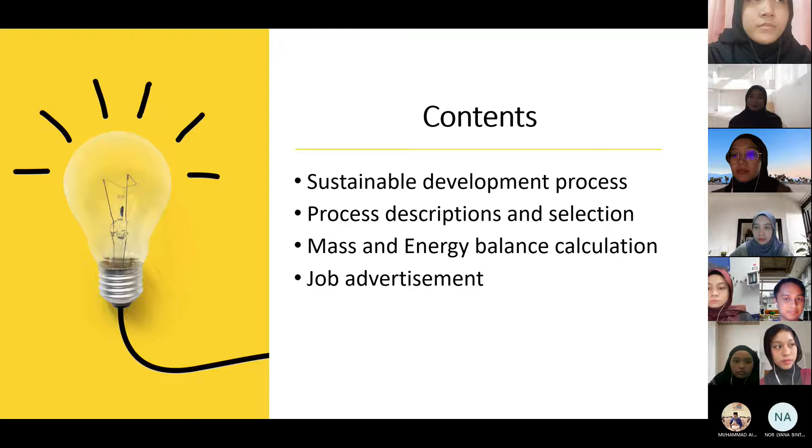First, sustainable development process that takes into account the impact of the following pillars to the proposed plan are environment, social, and economic. Environment: energy, electricity, and water. Methanol production process consumes vast amounts of energy and water. Influence of electricity sources and catalyst type on production of methanol.

Global warming: the lowest global warming impact was from co-production of methanol and renewable corn ethanol. Methanol is very harmful for human consumption because it is a flammable liquid with faintly sweet, pungent odors similar to ethyl alcohol, explosive and poisonous to humans.

Methanol is highly toxic for humans if inhaled or absorbed orally and can lead to blindness and, in worst case, even death. Methanol may affect animals, birds, and fish, leading to their death. Exposure can also cause slow growth rate in plants. Long-term methanol exposure can affect the fertility of biota and affect their appearance or behavior.

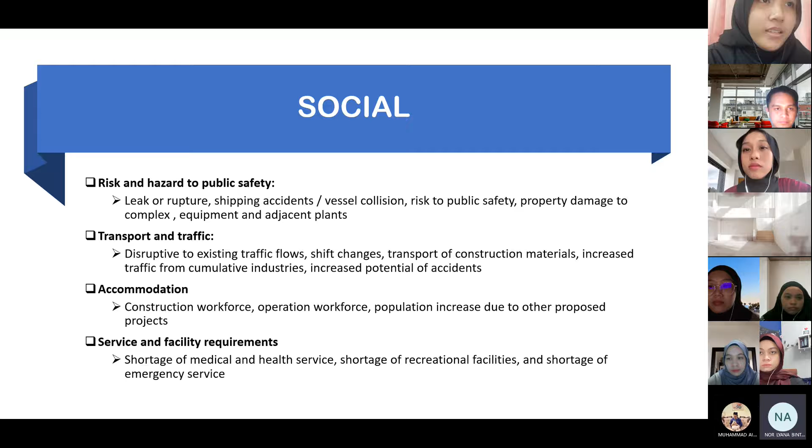Next, I will pass to Aisha.

Okay, then the economic: commodity pricing risks. The economic viability of small-scale methanol plants depends heavily on natural gas feedstock and methanol product pricing. High volatility or commodity price beyond this assumed in this analysis presented in the report should be carefully evaluated for impact on cost and economy. Next, technology risks.

A number of companies are developing small-scale methanol technologies, but none of them has deployed a commercial plant. Methanol production is mature at larger scale. Small-scale methanol may pose unknown or unanticipated risks, mainly because existing technologies have not been scaled up to commercial level as of the time of publication. Careful evaluations of technical viability with emphasis on scale-up risks should be conducted before investing in small-scale methanol plants.

Next, capital cost risks. Given the lack of commercially operating plants, capital costs of small-scale methanol plants were assumed for the economic analysis in this report. These capital costs should be verified and validated through careful cost estimation and planning.

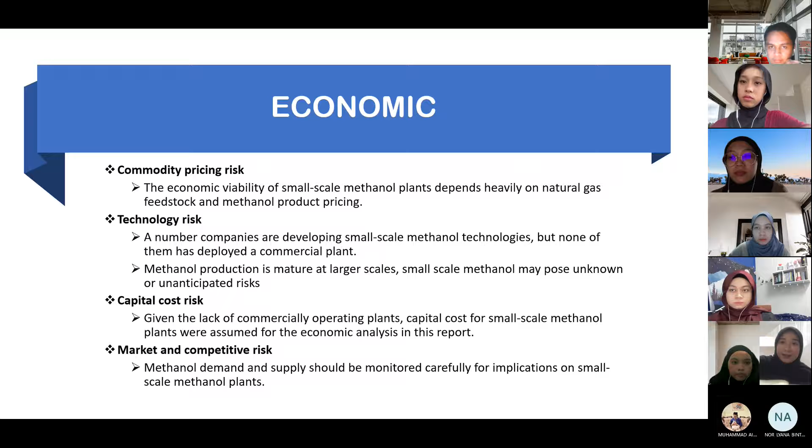Next is feasible suggestions. To reduce expense, the process of methanol needs to use a simpler and less costly syngas cleaning system based on a zinc bed, carbon filter, and zeolite membrane. Next, form a partnership with community members to prepare a suitable housing plan for the construction and operation crew. New plant should be designed using best practicable engineering design and operated using best industry practice management system.

Plant proposal that is not harmful to human, environment and animal. To reduce environmental impact, renewable energy should be used instead of coal and nuclear energy. To control global warming, the production of greenhouse gases must be kept in approximate balance.

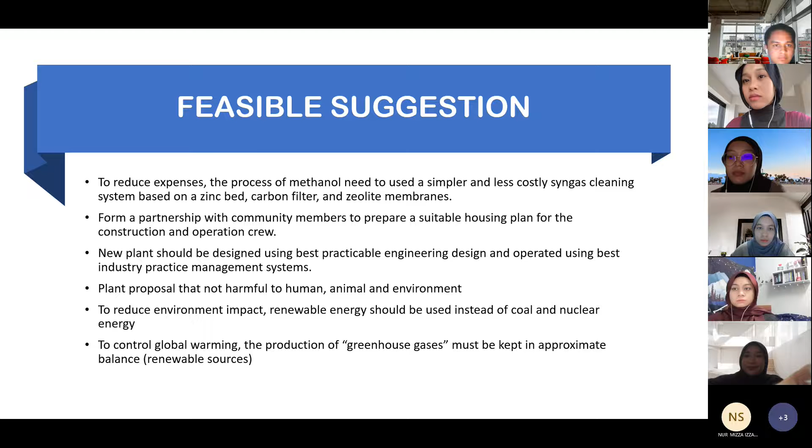Next, I will pass to task 2. Next, we are going to discuss the process description and selection. There are 5 processes available in the methanol processing industry. The first one is methanol production synthesis gas via carbon dioxide hydrogenation.

The second one is methanol production by catalytic reduction of carbon dioxide using copper and palladium as catalysts. The third one is methanol production via catalytic coal gasification. The fourth one is methanol production anaerobic digestion from squander stream. And the last one is methanol production via methanotrophic bacteria Methylacidiphilum fumariolicum.

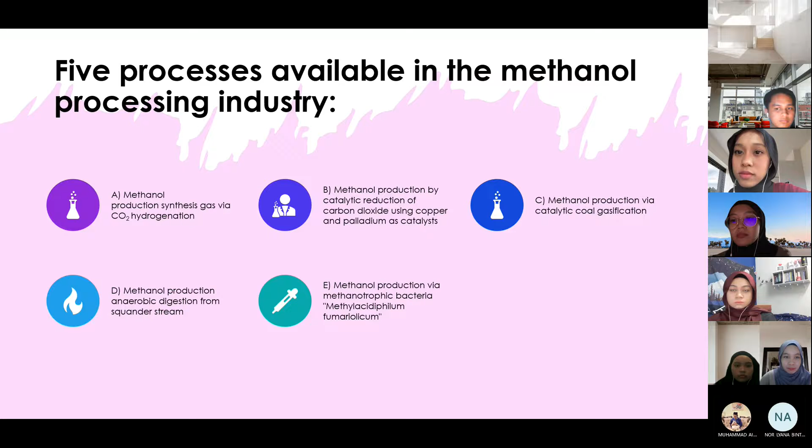So the description for the first process is methanol production synthesis gas via carbon dioxide hydrogenation. Methanol is manufactured conventionally from petroleum product synthesis gas via hydrogenation of carbon monoxide and carbon dioxide, as well as a reverse water gas shift process. Methanol is an important industrial chemical as well as a versatile fuel.

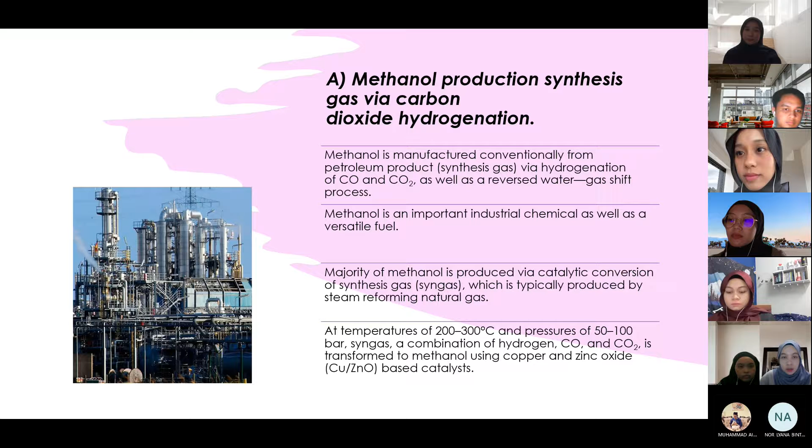Majority of methanol is produced via catalytic conversion of synthesis gas, which is typically produced by steam reforming natural gas. At a temperature of 200 to 300 degrees Celsius and pressure of 50 to 100 bar, syngas, a combination of hydrogen, carbon monoxide, and carbon dioxide, is transformed to methanol using copper and zinc oxide-based catalysts.

Next is methanol production by catalytic reduction of carbon dioxide using copper and palladium as catalysts. This utilizes carbon dioxide as the carbon source in hydrogen-based processes, where the hydrogen is created from water using renewable energy, and the reaction produces methanol. This will aid in the reduction of carbon dioxide emissions and the reduction of reliance on fossil fuels.

Using nanoparticles of the catalyst dispersed on a porous support material improves the surface area of the catalyst. Mixing palladium and copper gives the most efficient conversion of methanol from carbon dioxide, in the atomic ratio range of 0.3 to 0.4.

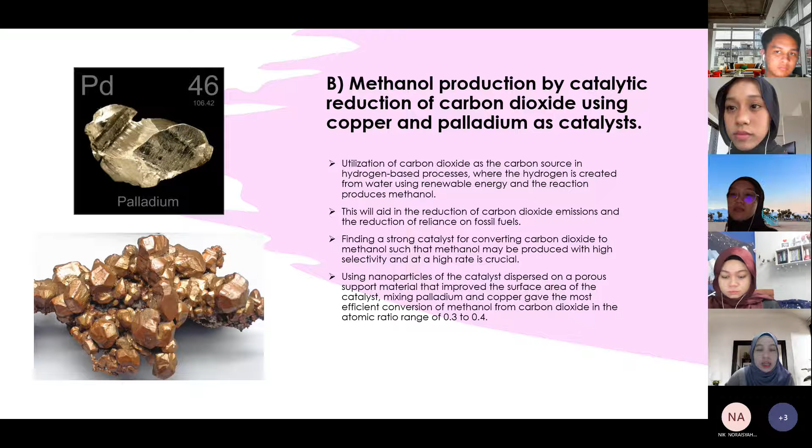One of the processes to produce methanol is via catalytic coal gasification. Gasification of coal produces synthesis gas, which is carbon monoxide and hydrogen, followed by catalytic conversion to manufacture methanol. This process is named the methanol from coal process.

Coal gasification is a process that transforms carbonaceous materials into carbon monoxide and hydrogen, such as coal, petroleum coke, or biomass. Coal gasification is growing in popularity as a power generation technology due to the readily available raw material around the world, as well as the beneficial environmental aspects associated with this technology over other combustion technologies.

Most of the methanol industry's progress in the early 21st century, the third golden age of methanol expansion, was fueled by China's rising economy. China's petrochemical industry had been heavily reliant on imported crude oil, despite the country's abundant supply of low-cost coal. China began to adopt innovative technology for converting coal into various chemicals, and methanol was a significant component in that process.

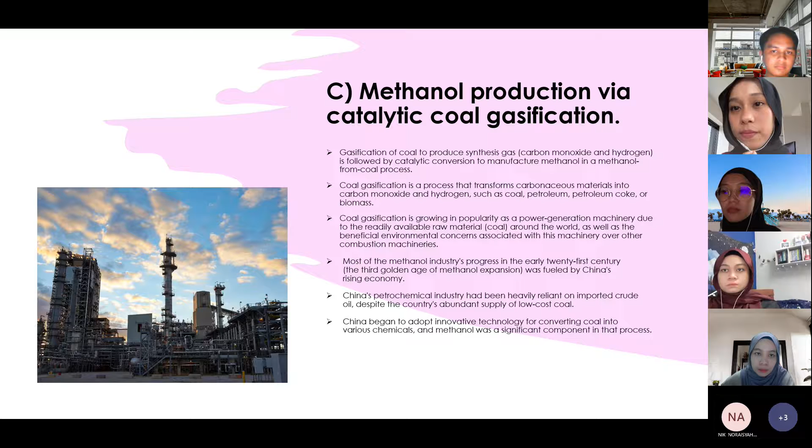Next is methanol production via anaerobic digestion from waste streams. Anaerobic digestion is a process in which microbes break down organic matter in the absence of oxygen. It is a low-energy, technologically easy method for converting organic material from a variety of wastewater types, solid waste, and biomass into methane. Anaerobic digestion for biogas generation occurs in a sealed vessel known as a reactor, which can be designed and built in a variety of forms and sizes depending on site and feedstock circumstances.

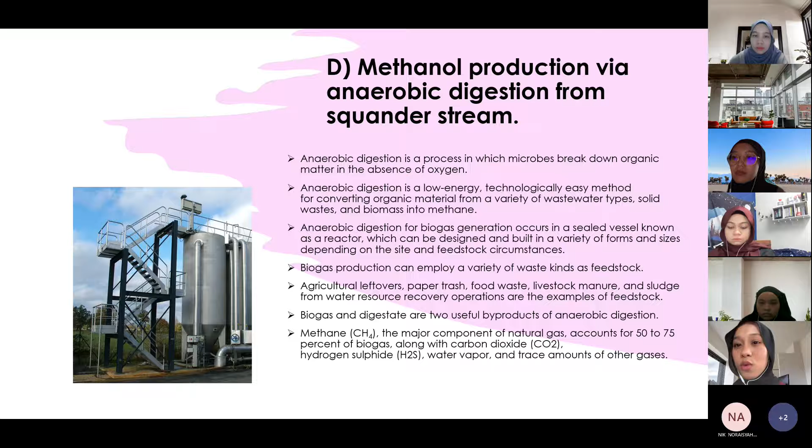Biogas production can employ a variety of waste kinds as feedstock. Agricultural leftovers, paper trash, food waste, livestock manure, and sludge from water resource recovery operations are examples of feedstock. Biogas and digestate are two useful byproducts of anaerobic digestion. Methane, the major component of natural gas, accounts for 50 to 75% of biogas, along with carbon dioxide, hydrogen sulfide, water vapor, and trace amounts of other gases.

Next is methanol production via methanotrophic bacteria, Methylacidiphilum fumariolicum. Modern methanol creation changes over methane from gaseous petrol into methanol through a multi-step compound interaction. Natural methane to methanol conversion occurs under moderate conditions, and utilizing biogas would be even more harmless to the ecosystem.

Methanotrophs, which are microorganisms that utilize methane as an energy source, convert methane into methanol in a single step, catalyzed by the compound methane monooxygenase. The enzyme methanol dehydrogenase catalyzes the subsequent transformation of methanol into formaldehyde, which is a significant task. Methanol dehydrogenase is required by aerobic methanotrophs, which are bacteria that oxidize methane for carbon and energy, to convert methanol to formaldehyde.

In this review, we utilize the thermoacidophilic methanotroph, Methylacidiphilum fumariolicum SolV for natural methanol creation.

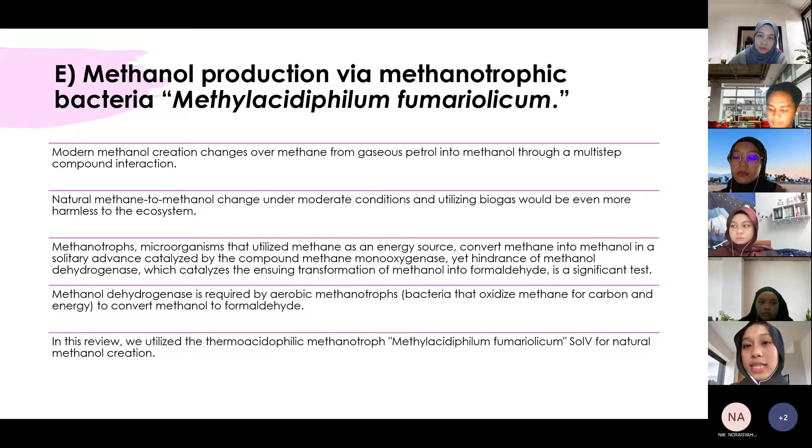Next is the merits and demerits of each process. The first one is methanol production, synthesis gas via carbon dioxide hydrogenation.

The merits are: carbon dioxide can be used directly, acting as feedstock to supply useful chemicals and materials; reduction of carbon dioxide quantity; and low cost. The demerits are: it is one of the greenhouse gases which may cause global warming, and reversible reaction and formation of greenhouse gas may also occur.

The next one is methanol production by catalytic reduction of carbon dioxide using copper and palladium as catalysts. The merits are reduced carbon dioxide emissions, reaction conditions are milder due to less exothermic reactions, and methanol can be produced in high selectivity at an efficient rate.

The demerits are: it is less reactive than syngas, which leads to larger reactors being needed; more water is produced due to the reverse water gas shift reaction; higher carbon dioxide partial pressure; and more carbon dioxide produced in crude methanol.

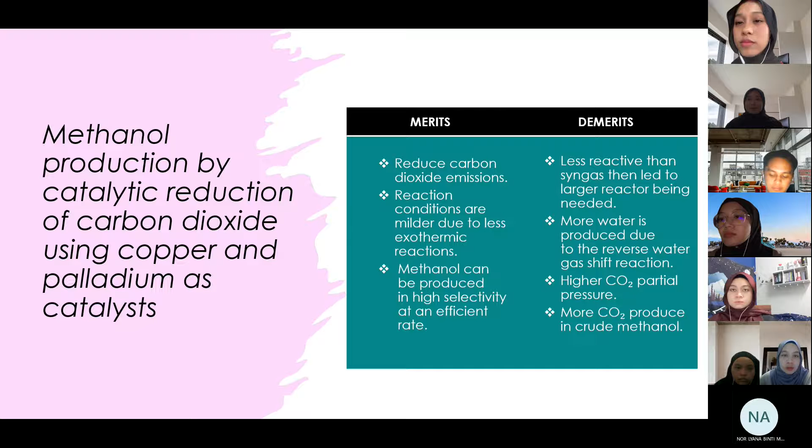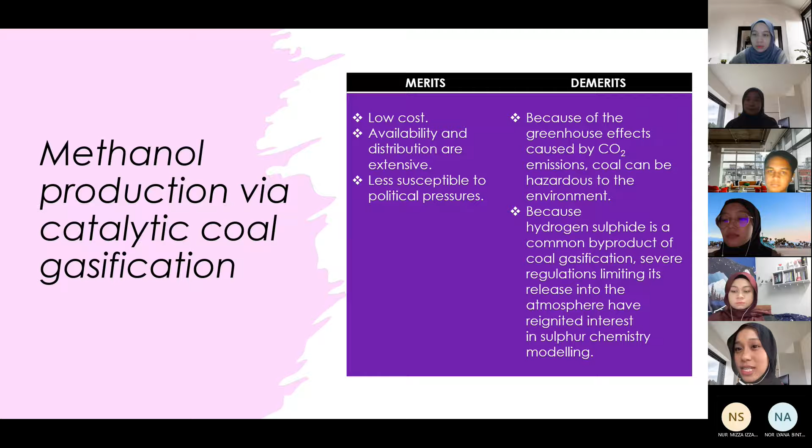Now let's review the merits and demerits of methanol production via catalytic coal gasification. The merits are low cost, large availability and distribution, and being less susceptible to political pressures. The demerits are that coal can be hazardous to the environment because of the greenhouse effects caused by carbon dioxide emissions, and severe regulations limiting its release into the atmosphere have reignited interest in sulfur chemistry modeling, because hydrogen sulfide is a common byproduct of coal gasification.

Next is methanol production via anaerobic digestion from sewage streams. The merits are that it converts sewage into renewable technology, creates a more environmentally friendly gasoline, and removes germs dangerous to humans from biological waste. Fertilizer is manufactured, and it helps lower our carbon footprint. The demerits are that it does not convert as much carbon from biomass to biogas as gasification does, and methane producing organisms develop at a slower rate than aerobic species.

Last is the merits and demerits of methanol production via methanotrophic bacteria, Methylacidiphilum fumariolicum. The merits are low cost and an efficient methane liquefaction model. The demerits are difficulties at high cell densities, biphasic cell development processes, and chemical methanol dehydrogenase inhibitors, which can also inhibit other important enzymes, being used to increase methane conversion.

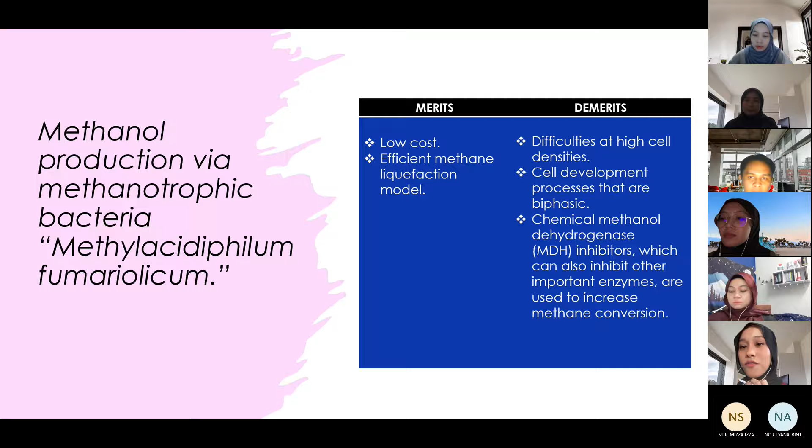Okay, next we are going to discuss the process block diagram, process description, process flow diagram (PFD), reaction stoichiometry, and supply of raw material.

Figure 1 shows the block flow diagram, BFD, for the methanol process. The block diagram explains how methanol is produced for industry. Overall, the process consists of 5 stages, beginning with the raw material, which is syngas, and ending with product inspection, which is methanol. The methanol production process is a typical loop process.

First, syngas is collected to serve as raw material for methanol production. After that, the syngas is fed into the methanol reactor and then separated in a separator. The separated syngas is then transferred to undergo off-gas separation. Gas separation is a technique used to split up gases, either to separate and purify multiple or single gas components. Then the products of off-gas separation are either recycled back into the methanol reactor or directed to the methanol distillation process to produce methanol.

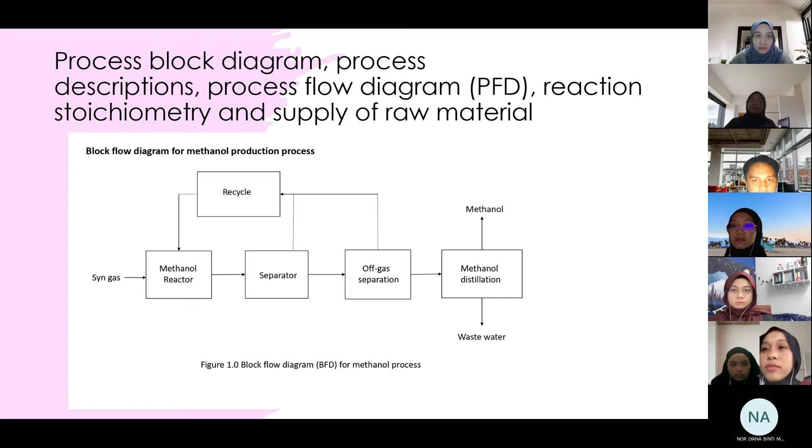Copper and zinc-based catalysts are widely utilized in this process. Natural gas reforming to produce syngas, conversion of syngas to crude methanol, and distillation of crude methanol are the three basic phases in the manufacturing of methanol. Exothermic hydrogenation of carbon monoxide and carbon dioxide is represented by equations 1 and 2, whereas the water-gas shift process is represented by equation 3. Because methanol synthesis from syngas is very exothermic, it is essential that the reactor vessel be fitted with a heat removal system. So these are the three chemical reactions going on.

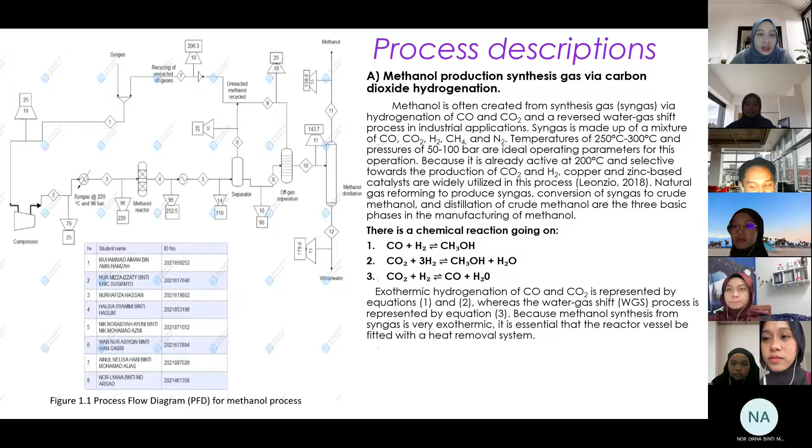The methanol process flow diagram is shown in figure 1.1. The compressor block was used to compress upgraded syngas from the water gas shift reactor. The compressor's design was outside the scope of this research. We employed an isentropic efficiency of 85% and a mechanical efficiency of 98%.

For methanol production, compressed syngas was warmed to 220 degrees Celsius. The vapors that exited the reactor were cooled. The separator, or flash drum, was used to remove unreacted gases from methanol. The unreacted vapors were partly recycled while the remainder was burned. The separator was used to distill liquid methanol from the flash drum. Methanol distillation gases were recycled as a separate product, and half of the pure methanol was collected.

At stream 1, the temperature is 25 degrees Celsius and the pressure is 10 bar. For the second stream, the temperature is 25 and the pressure is 70 bar. For the third stream, the temperature is 220 degrees Celsius and the pressure is 96 bar. For the fourth stream, the temperature is 252.5 degrees Celsius and the pressure is 95. For the fifth stream, the temperature is 110 degrees Celsius and the pressure is 14 bar.

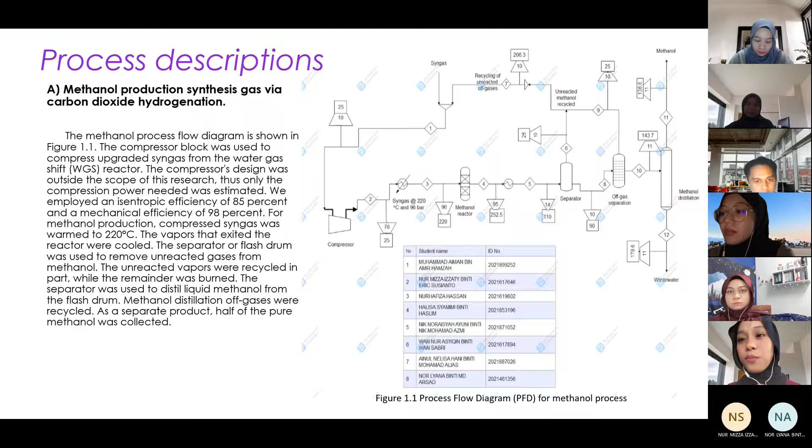And for the last one, which is the 12th stream, the temperature is 178.6 degrees Celsius and the pressure is 11 bar. Next is the supply of raw materials.

The first one is syngas. Carbon dioxide, carbon monoxide, hydrogen, methane, and nitrogen make up syngas. Syngas can be made from a variety of sources, including natural gas, coal, biomass, and petroleum distillate using a thermochemical process.

The next one is copper-based catalyst, achieved by mixing metal oxide with copper oxide in a series of steps. To begin, prepare a slurry solution containing catalyst precipitate by combining an acidic metal salt solution with precipitant solution. The precipitate is then rinsed in a slurry solution, maintaining the suspended condition.

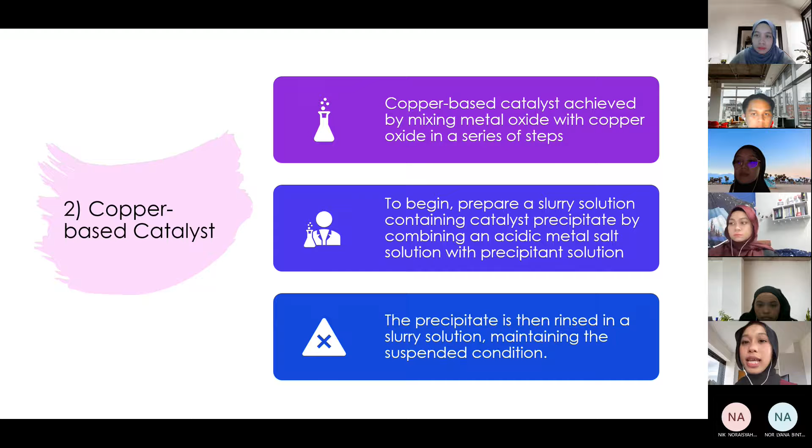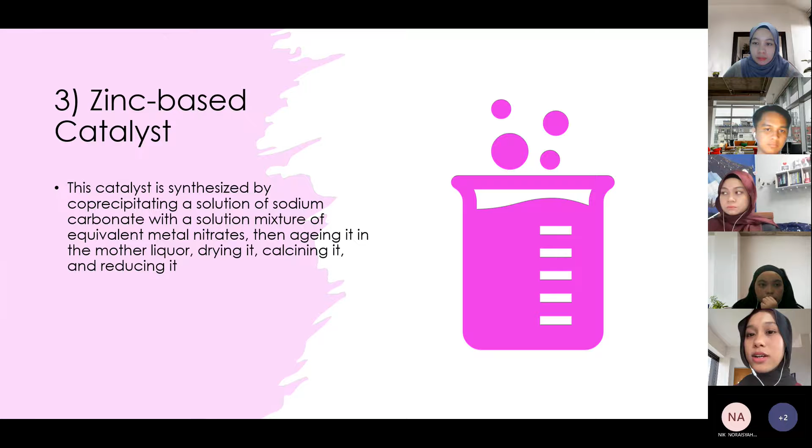And the last raw material is zinc-based catalyst. This catalyst is synthesized by co-precipitating a solution of sodium carbonate with a solution mixture of equivalent metal nitrates, aging it in the mother liquor, drying it, calcining it, and reducing it.

Next, 5 utilities and the importance of utilities and other support systems. The first one is cooling water. The function of cooling water is to remove heat from component or processes. Process fluid or equipment result in a rise of temperature or change of state in the cooling system.

The importance of cooling water is to cool processes and equipment in a closed recirculation system. Water containing heat transfer is cooled for reuse and the water loss is small.

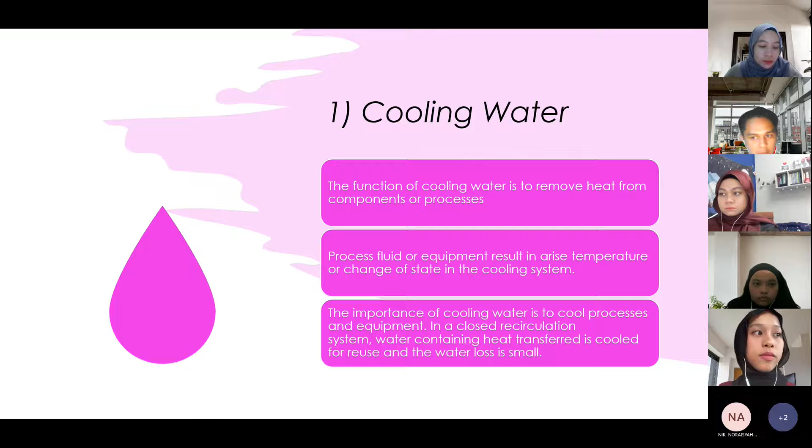The second one is steam or condensate system. Steam refers to the white mist that condenses above the boiling water as the hot vapor mixes with the cooler air. The steam has been condensed back into water by either raising its pressure or lowering its temperature. Steam vapor releases the latent energy to the process fluid and condenses to a liquid condensate.

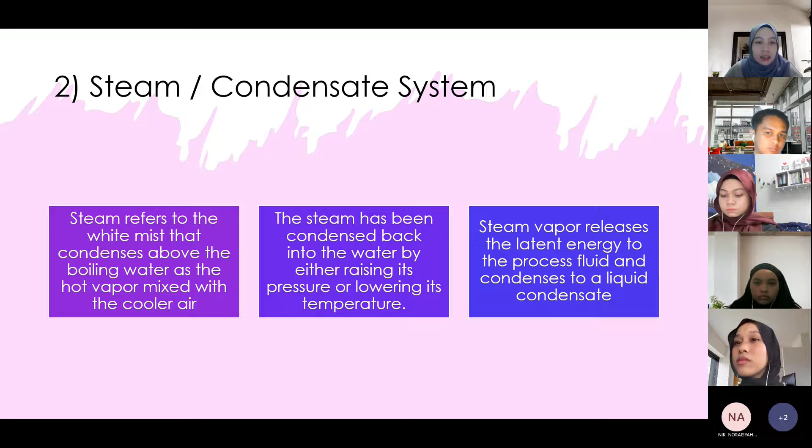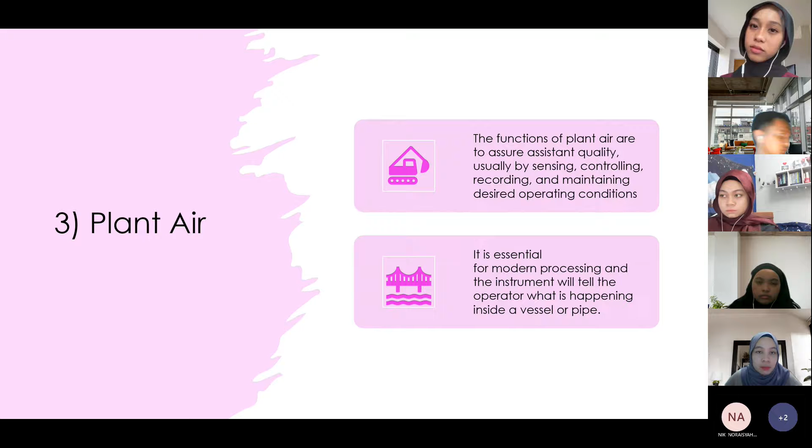The third one is plant air. The function of plant air is to assure assistant quality, usually by sensing, controlling, recording, and maintaining desired operating conditions. It is essential for modern processing, and the instrument will tell the operator what is happening inside a vessel or pipe. The fourth one is electricity system.

The electricity generation is divided into two regimes, which are ordinary regime generation and special regime generation, which are to obtain the requisite license and approvals. Last, the operation of the electricity market is to operate on a free market basis and integrate into the functioning of any organized electricity market.

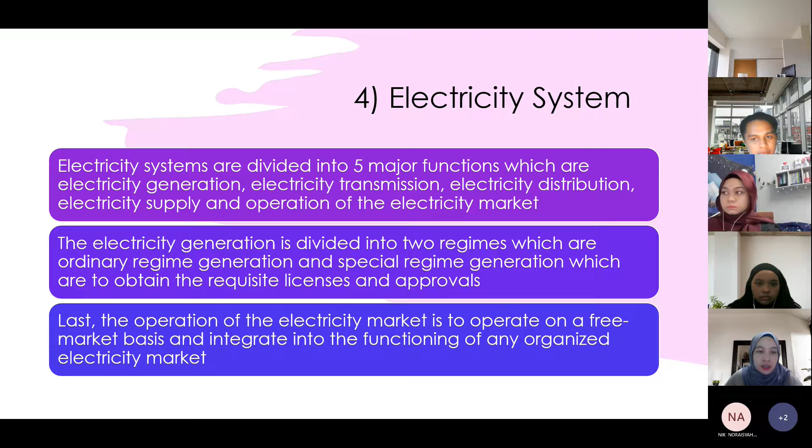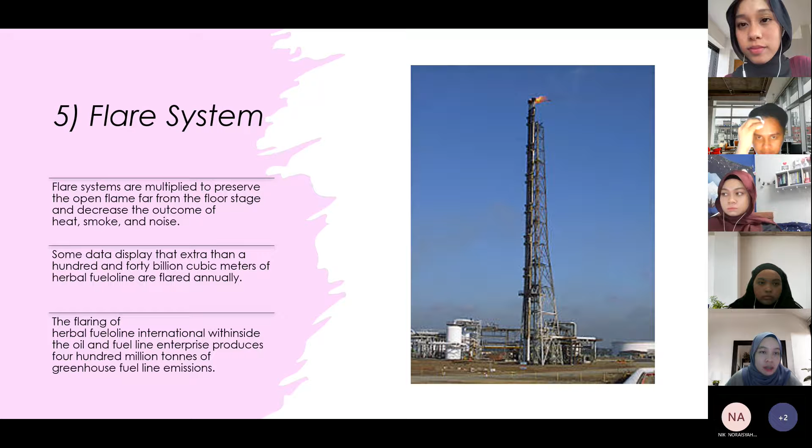The last one is flare system. Flare systems are employed to preserve the open flame far from the floor stage and decrease the outcome of heat, smoke, and noise. Some data display that more than 140 billion cubic meters of natural gas are flared annually. The flaring of natural gas globally within the oil and gas industry produces 400 million tons of greenhouse gas emissions.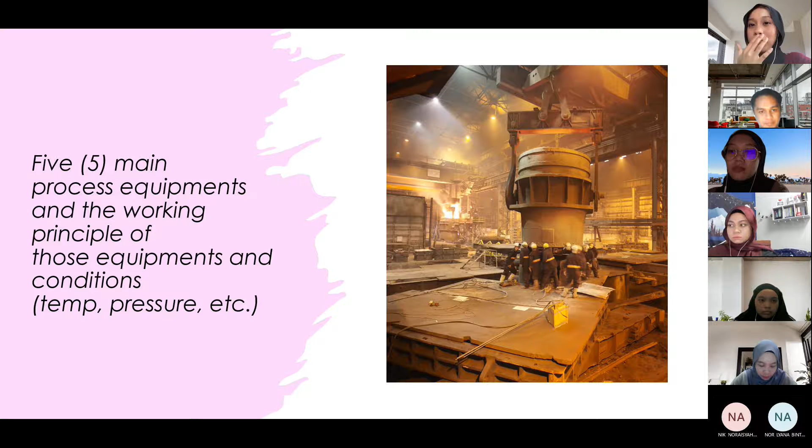Five main process equipments and the working principle of those equipments and conditions. The first one is heat exchanger. There are four types of heat exchangers, and one commonly used is the shell and tube heat exchanger.

Each one is employed in a unique method to recover heat from exhaust steam by heating the feed water that circulates throughout the units. From the turbine gland steam system, the gland steam condenser gathers steam, vapor, and also air. The steam is condensed and then returned, and the returns are cooled by the flowing feed water.

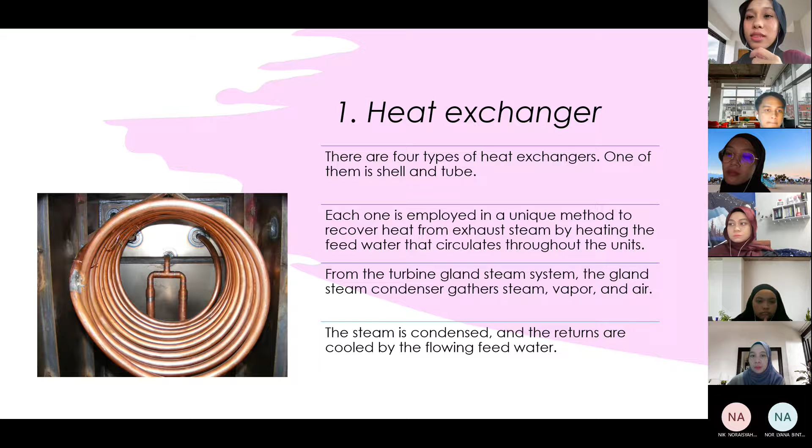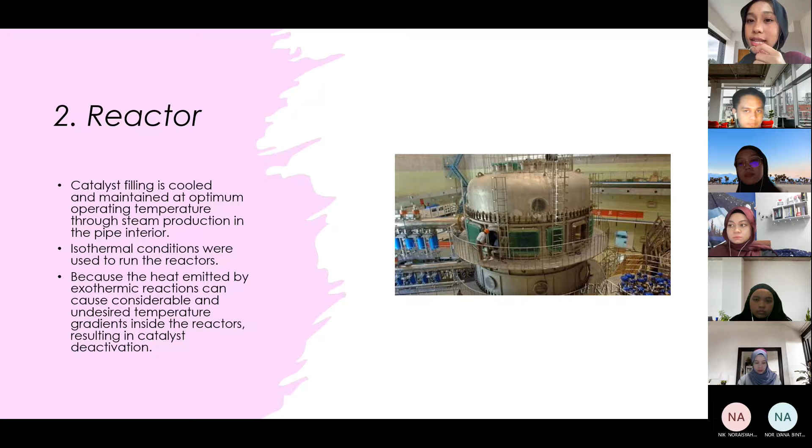Next is reactor. Catalyst filling is cooled and maintained at optimum operating temperature through steam production in the pipe interior. Isothermal conditions were used to run the reactors because the heat emitted by exothermic reactions can cause considerable and undesired temperature gradients inside the reactors, resulting in catalyst deactivation.

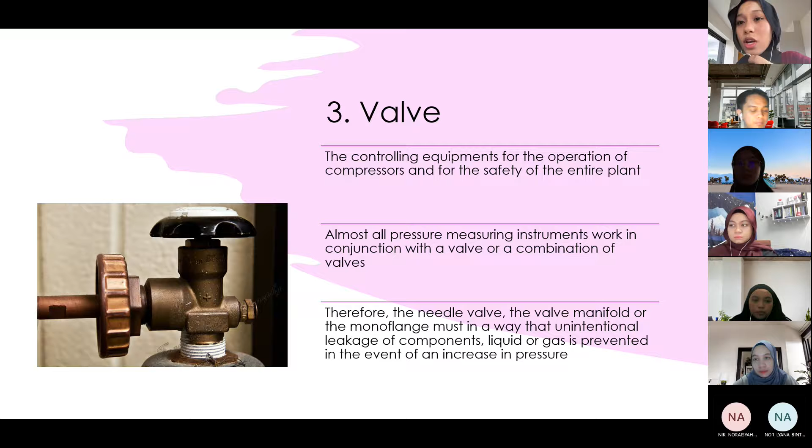The next one is valve, the controlling equipment for the operation of compressors and for the safety of the entire plant. Almost all pressure measuring instruments work in conjunction with a valve or a combination of valves. Therefore, the needle valve, the valve manifold, or the monoflange must in a way that unintentional leakage of components, liquid or gas is prevented in the event of an increase in pressure.

Next is the distillation column. The distillation column is made up of a series of stacked plates. The liquid flows over the plates and vapor bubbles up through the liquid via holes in the plates. Due to the many plates, vapor comes into contact with the liquid several times as it moves down the column. It is a crucial part in the distillation columns.

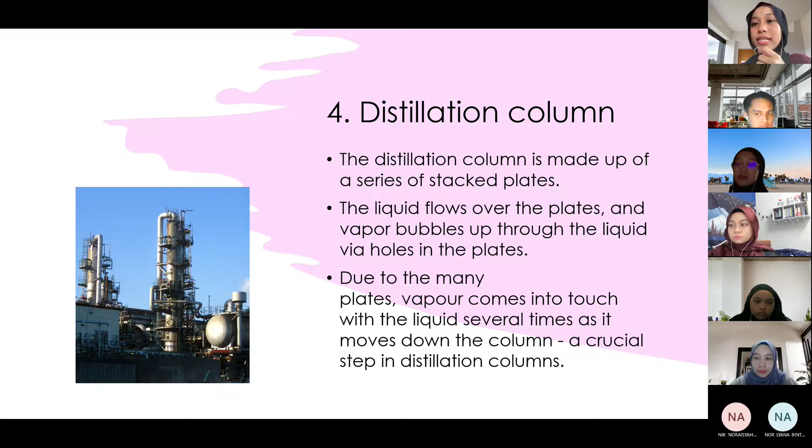And the last one is the compressors. Compressors work by increasing the pressure of a fluid while lowering its volume, which improves energy efficiency. By raising the velocity of the air with a spinning element, the compressor imparts kinetic energy into the air stream, which is then converted into potential energy in the form of pressure. The air is then cooled and excess moisture is eliminated between each step of compression to improve efficiency and also air quality.

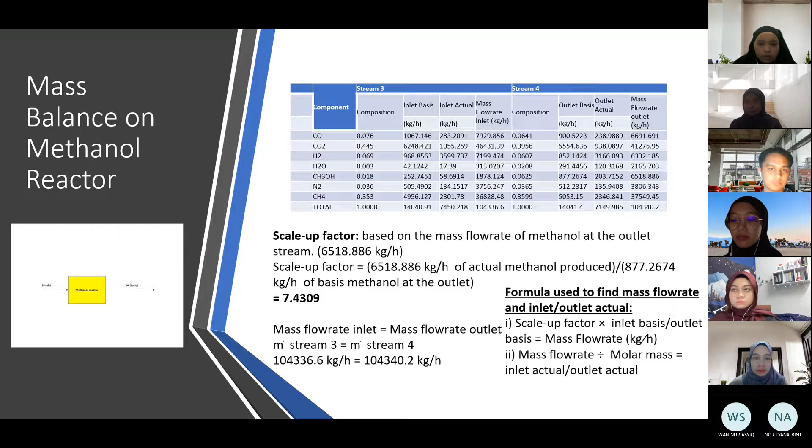Moving on to separator. In this process, not 100% of the component will undergo further processing because some will go to recycle pathways. That is why there are 2 outlet streams, which are stream 6 for the component undergoing recycling and stream 8 for further process.

The composition component of stream 6 is taken from a journal as our reference. To find the mass flow rate outlet of stream 8, we can do a mathematical calculation, which is the mass flow of stream 5 minus mass flow of stream 6.

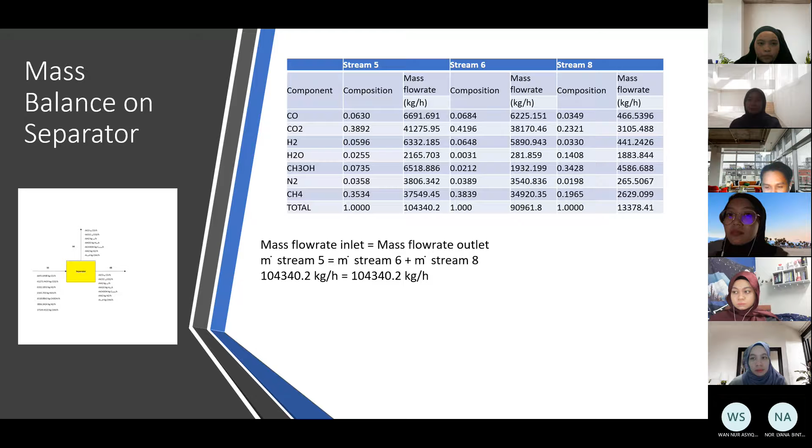Therefore, we can get the total mass flow rate of stream 5 is equivalent to mass flow rate stream 6 plus stream 8. The composition component of stream 8 can be found by using a formula of mass flow rate of component divided by total mass flow rate of stream 8.

Thirdly, gas separation. In this process, it only involves the separation of gas component and non-gas component. Stream 8 is the inlet stream, while stream 9 and stream 10 are outlet streams. There is no mathematical calculation needed since it's only the gas separation process.

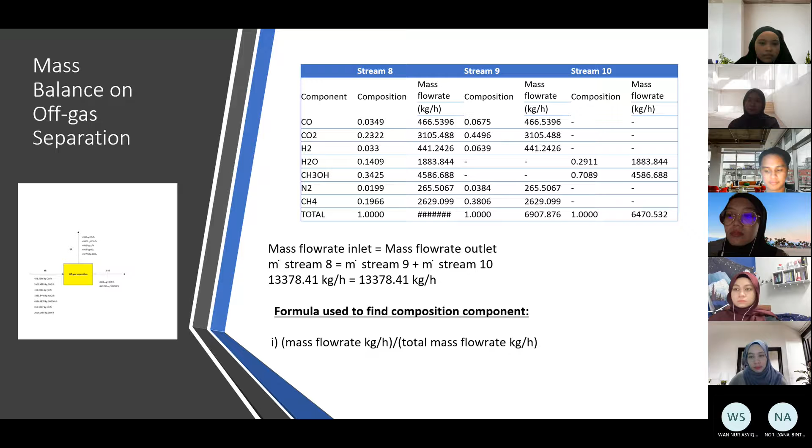Therefore, the total mass flow rate of stream 8 is equivalent to mass flow rate stream 9 plus 10 composition component. Composition component for stream 9 and 10 can be found by using the formula as shown on the slide.

Moving on to the fourth one, which is methanol distillation. In this process, it involves the production of methanol at stream 11 and wastewater at stream 12. Since the demand in producing methanol is 4,563.7544 kg per hour, therefore the purity of methanol can be assumed to be 99.5%. The composition for methanol at stream 11 is set to be 0.995 and for water is 0.005.

To find the mass flow rate at stream 12, perform a mathematical calculation where mass flow at stream 10 minus mass flow at stream 11 gives mass flow at stream 12. Therefore, the total mass flow at stream 10 is equivalent to mass flow at stream 11 plus stream 12.

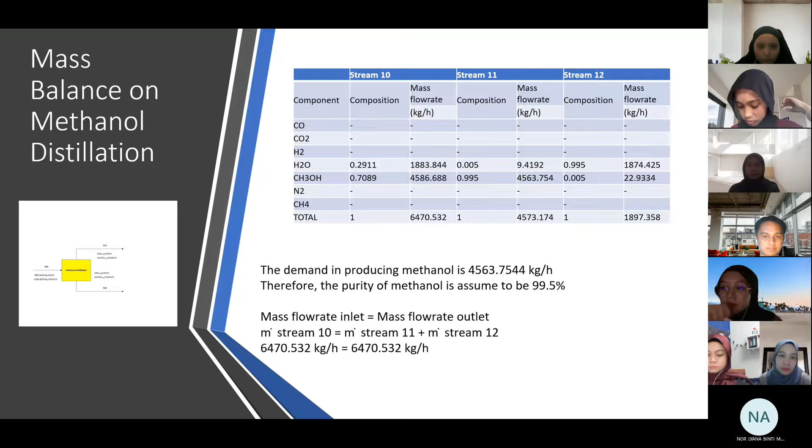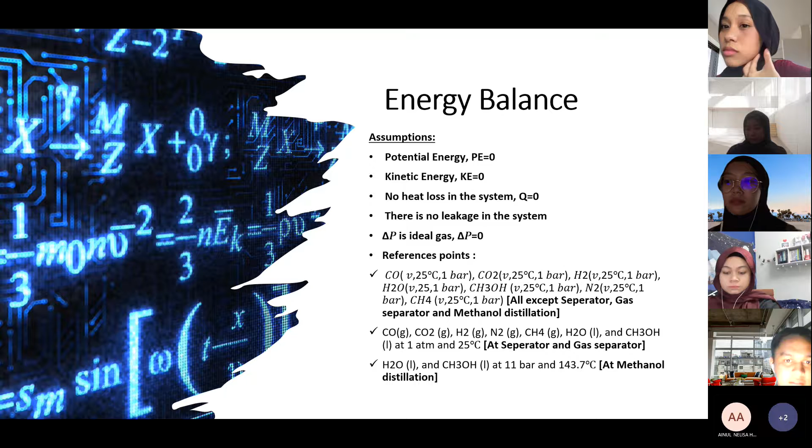Okay, so for energy balance, first before we calculate the energy balance, we need to list some assumptions. The assumptions are: potential energy is equal to 0, kinetic energy equal to 0, there is no heat loss in the system, Q equal to 0, there is no leakage in the system, change in pressure is ideal gas, therefore delta P is equal to 0.

For reference point, we have 3 reference points. It depends on the equipment in the system. Firstly, as you can see, the first reference point has all the components. It is applicable to all the equipment except for separator, gas separator, and methanol distillation.

For the second reference point, as you can see, it is quite similar to the first one, but what is different is the state of matter for water and methanol, which is in liquid. So this reference point is used for separator and gas separator.

Lastly, there are 2 components, which is water and methanol in liquid state at 11 bar and 143.7 degrees Celsius at methanol distillation.

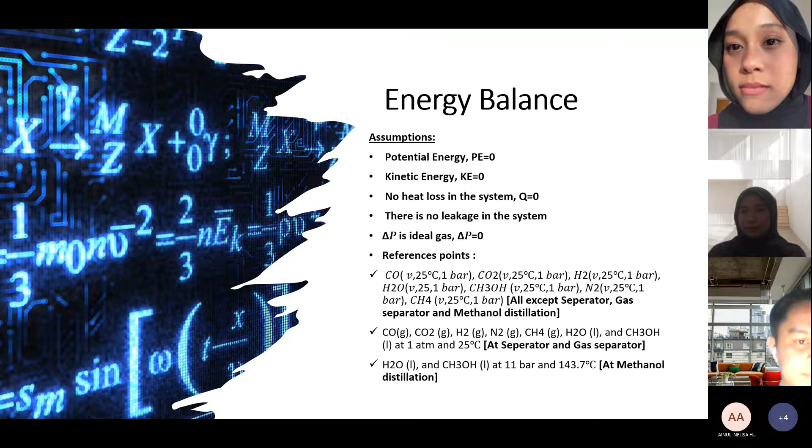So the list of formulas that we use for the energy calculation are, first, delta T, which is change in temperature, is equal to the integral from temperature reference to temperature of CP dt. CP stands for heat capacity constant. Next, Q, which is heat in the system, equals to summation of heat out minus summation of heat in.

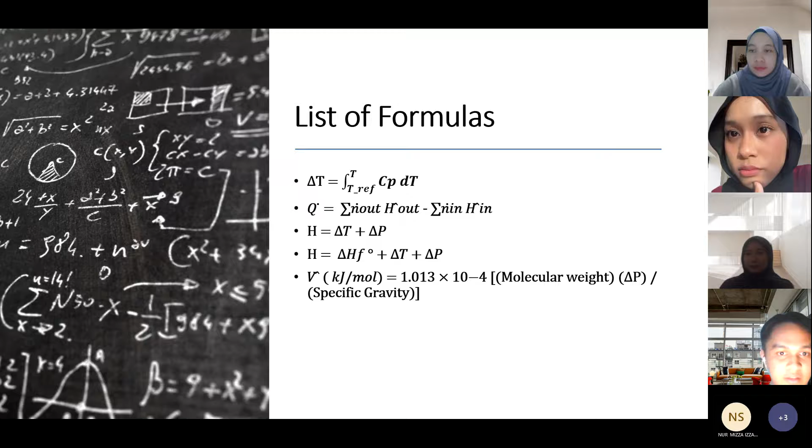Second, H is equal to delta T plus delta P. As you can see in the previous slide, we assume delta P is ideal gas, so we can neglect the delta P, which is 0.

Secondly, next, H is equal to delta HF plus delta T plus delta P. Why is there delta HF? Delta HF stands for heat of formation. So this formula is used for the equipment in the reactor.

Lastly, for specific volume is equal to 1.013 times 10 to the power of -4 times molecular weight times change in pressure, divided by specific gravity.

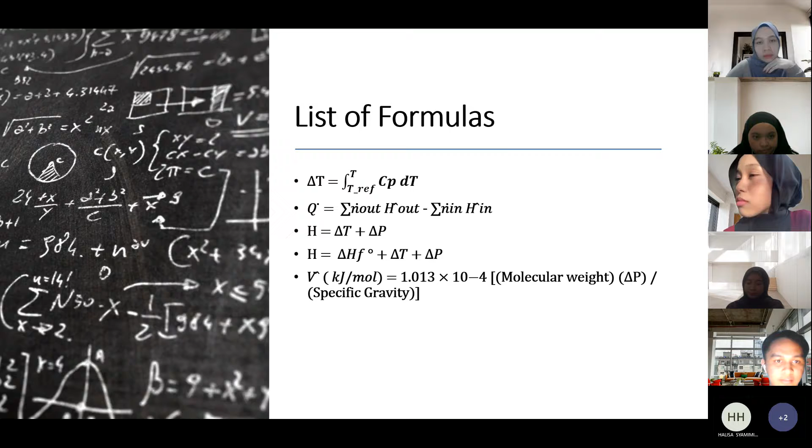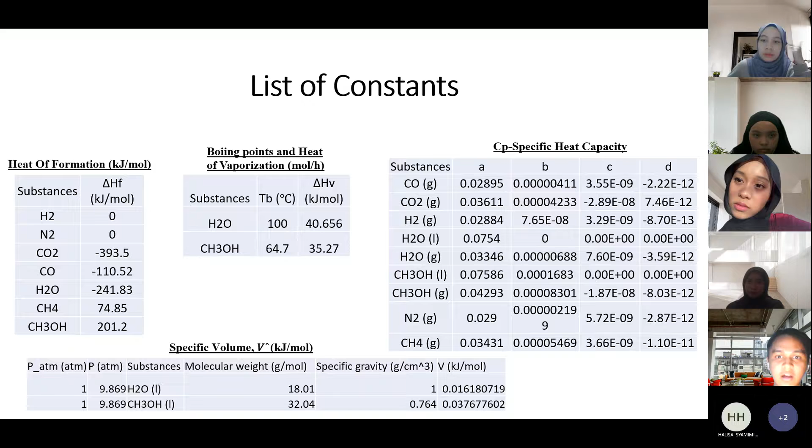Next, as you can see in the slide, there are 4 tables of constants. Firstly, heat of formation, boiling point, and heat of vaporization, specific heat capacity, and lastly specific volume V. Heat of formation, boiling point, and specific heat capacity data are obtained from the Elementary Principles of Chemical Processes book.

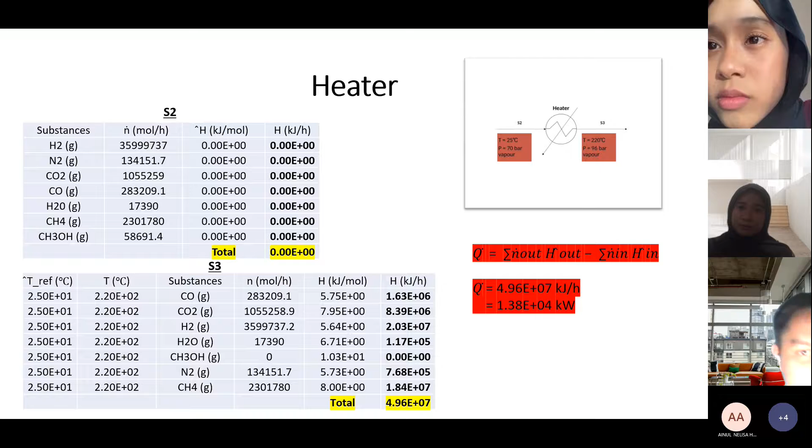Proceed to the next equipment, reactor. As I said earlier, in the reactor we need to add additional heat, which is heat of formation. And in this table, we add also the temperature reference and temperature to get the value of H.

And we get the heat in the system as follows. The total for inlet, which is stream 3, is equal to negative 3.38 times 10 to the power of 7. For stream 4, same as stream 3, we get negative 1.51 times 10 to the power of 8. And we get the heat for this equipment is negative 3.27 times 10 to the power of 4 kilowatt.

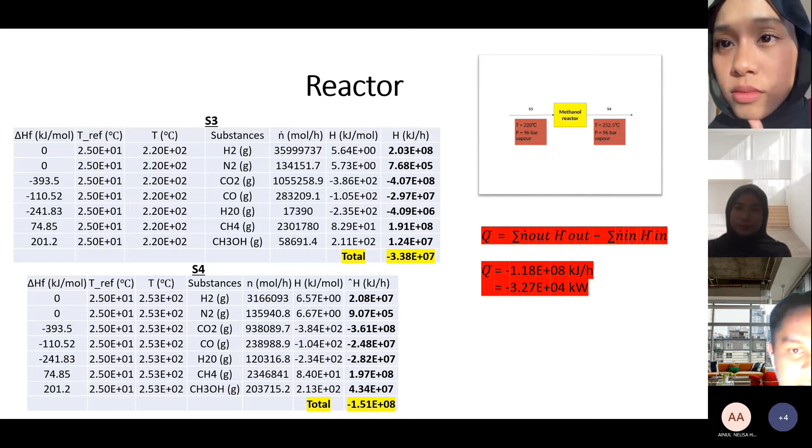Next, for cooler, there are 2 streams, which are stream 4 and stream 5. Stream 4 as inlet, stream 5 as outlet. So for inlet, we get 5.8 times 10 to the power of 7, while for stream 5, we get 2.53 times 10 to the power of 7.

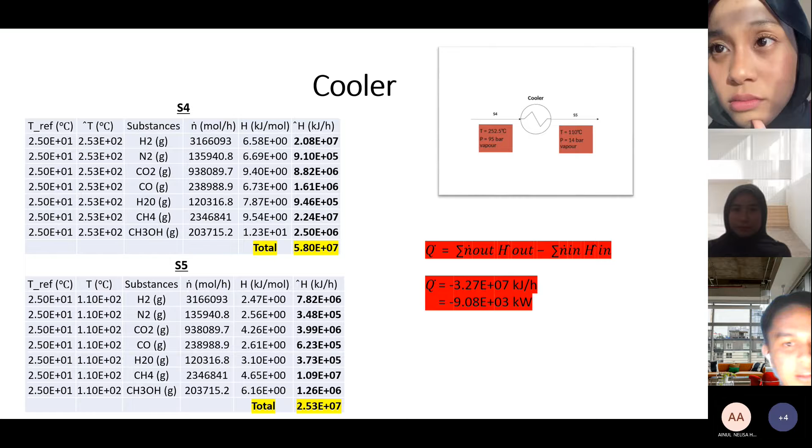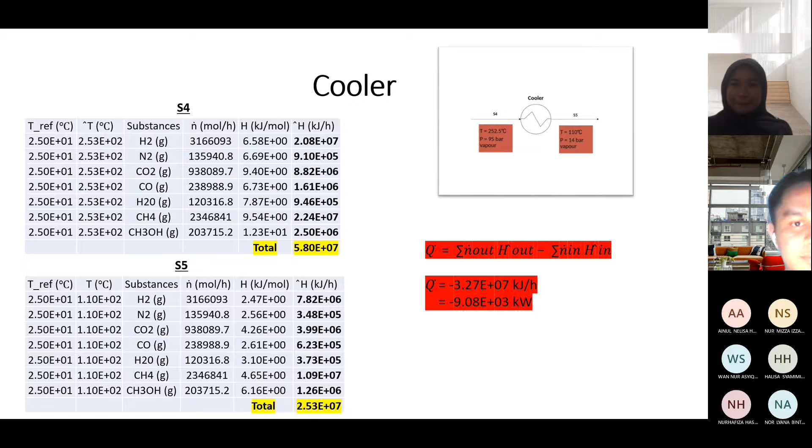So to find the heat exerted on this equipment, out minus in, and we get negative 3.27 times 10 to the power of 7, and converting to watt, we get negative 9.08 times 10 to the power of 3 kilowatt. For the next equipment, separator.

As you can see in this diagram, they have 3 streams: stream 5, stream 6, and stream 8. So for stream 5 as the inlet, we get the total is 3.33 times 10 to the power of 7.

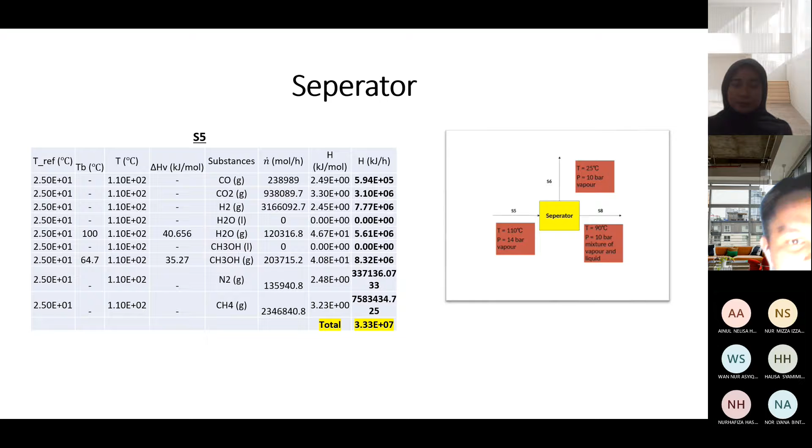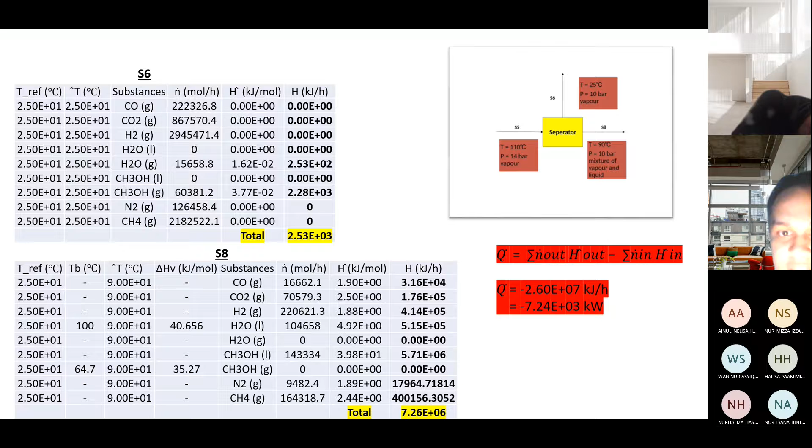For stream 6 and stream 8, actually for outlet, we get the total is 2.53 times 10 to the power of 3 and 7.26 times 10 to the power of 6. So in order to find the heat in the system, heat out minus heat in, we get negative 2.6 times 10 to the power of 7 kilojoule per hour, and converting to watt, we get negative 7.24 times 10 to the power of 3 kilowatt.

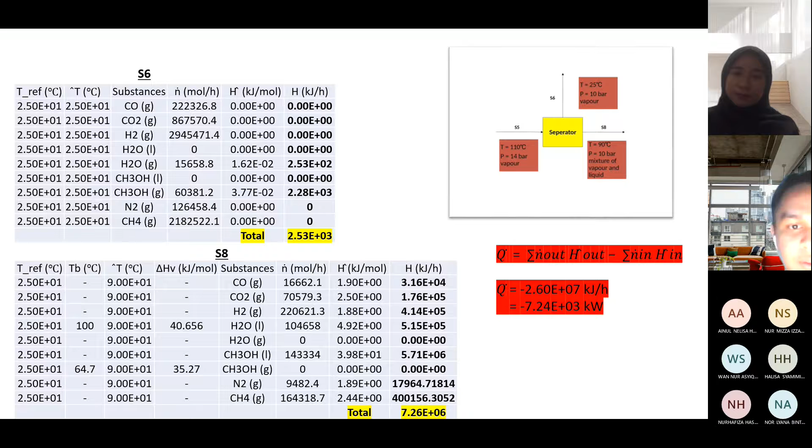Moving on to the next equipment, which is gas separator. Gas separator also has 3 streams: stream 8, stream 9, stream 10. So for stream 8 as inlet, we get the value of 7.26 times 10 to the power of 6.

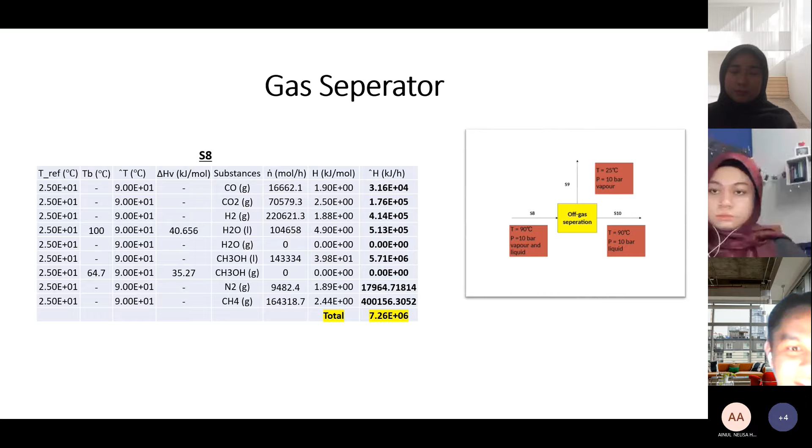For outlet, which are stream 9 and stream 10. As you can see, for stream 9, we get 0 total because the temperature reference is the same as the temperature in the system, which is 25. So when we integrate for the same limit, we get 0.

For stream 10, we add some columns, which is boiling point and heat of vaporization, because for stream 10, there are some components that change phase, which is, if I'm not mistaken, water and methanol. So we need to consider the value.

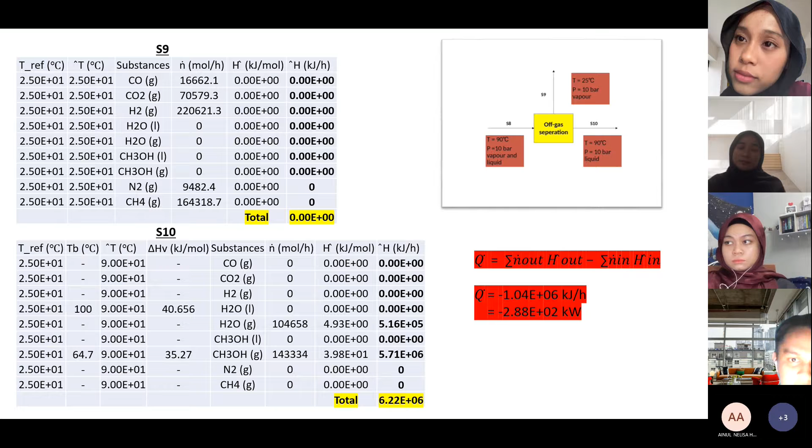So we get the total, the value that I bolded, which is 6.22 times 10 to the power of 6. To find the heat in for this equipment, out minus in as usual, and we get negative 1.04 times 10 to the power of 6 kilojoule, and to convert to kilowatt, we divide by 3600, and we get negative 2.88 times 10 to the power of 2 kilowatt.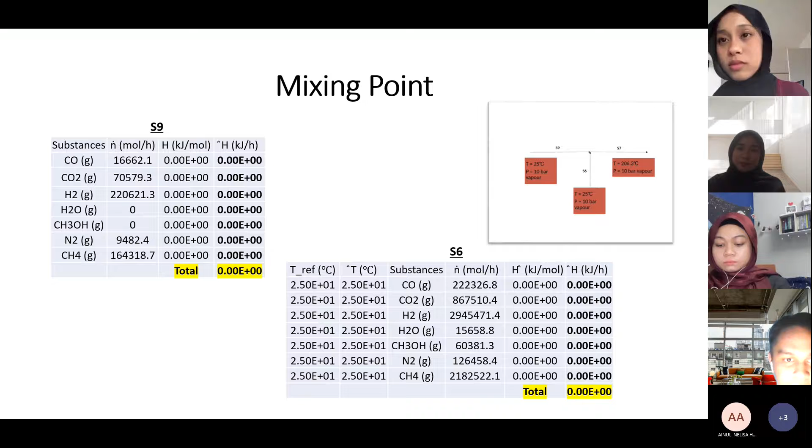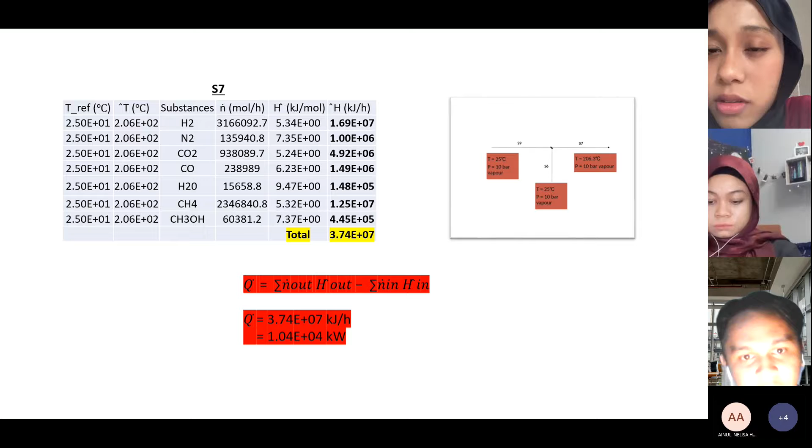For outlet, which is stream 7, the temperature reference is 25 degrees Celsius and the temperature in the system is 206 degrees Celsius. We get the total for stream 7 as 3.74 times 10 to the power of 7 kilojoule per hour. So in order to find the heat in the equipment, as you can see in the red one, we get the total of 3.74 times 10 to the power of 7 kilojoule per hour, and the power is 1.04 times 10 to the power of 4 kilowatt.

Last but not least, methanol distillation. Methanol distillation has 3 streams: stream 10, 11, and 12. For inlet, there is 1 stream, and 2 streams for outlet. For stream 10, the value is 0 because, as you remember from the earlier slide,

we assume the methanol distillation to be at 11 bar at 143.7 degrees Celsius, so it is the same as the system. So when the temperature is the same as the reference, when we calculate, we get 0.

So for stream 11, there are two columns we add, which is boiling point and heat of vaporization. We get the total energy for stream 11 as 2.53 times 10 to the power of 6.

And lastly, stream 12, we get the total as 2.57 times 10 to the power of 5. So to find the heat in the methanol distillation, we use the same formula and we get 2.79 times 10 to the power of 6 kilojoule per hour. To convert to power, we get 7.75 times 10 to the power of 2 kilowatt. That's all for me, thank you.

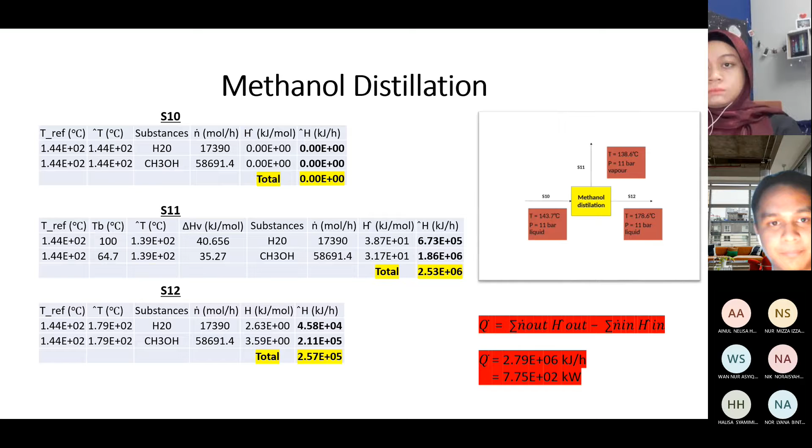Okay, let's move to the job advertisement for 10 working positions. There are 5 general requirements: first, the person should have good communication skills, especially when dealing with someone about business. Second, good command of Mandarin, English, and Bahasa Malaysia. Third, good analytical, problem solving, and strong interpersonal skill. Next, proficient in Microsoft Office. And lastly, he or she should be able to work in a team.

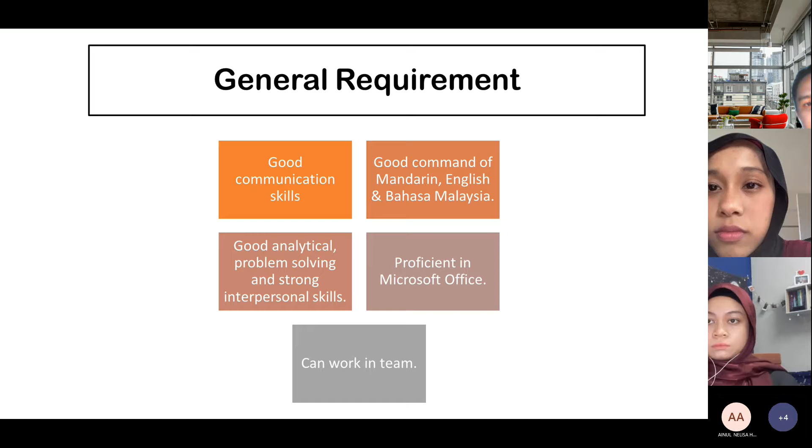So the first position is risk and safety engineer. A risk and safety engineer should make sure the workplace is safe, and should also monitor the general work environment, inspect the building and machinery, and recommend safety features in process and product. For the risk and safety engineer, the expected salary is around 2,400 to 4,500 per month.

The qualification should be a minimum undergraduate in chemical engineering or equivalent. He or she should have good basic programming skill and must have the ability to manage project workload.

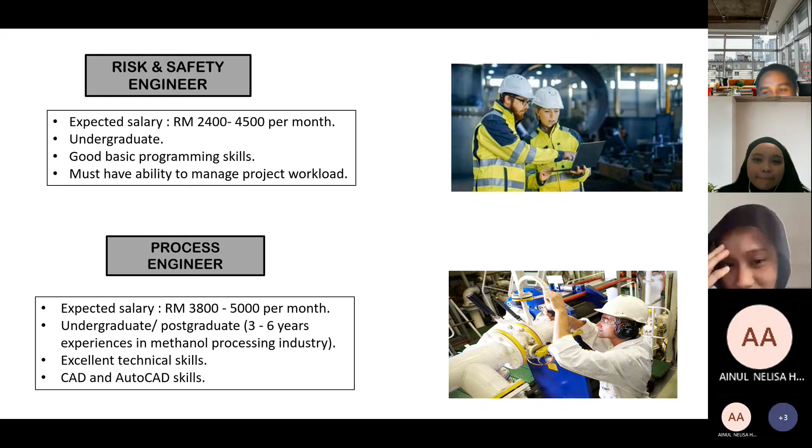Okay, so for the second position, process engineer. The process engineer is involved in helping to transform raw material into valuable product, and is also responsible for designing, implementing, controlling, and optimizing the industrial process and machinery in the manufacturing industry. Expected salary for this position is around RM 3,800 to 5,000 per month, with a minimum qualification of undergraduate or postgraduate with 3 to 6 years of working experience in the methanol processing industry. The person should have excellent technical skill and excellent CAD and AutoCAD skill.

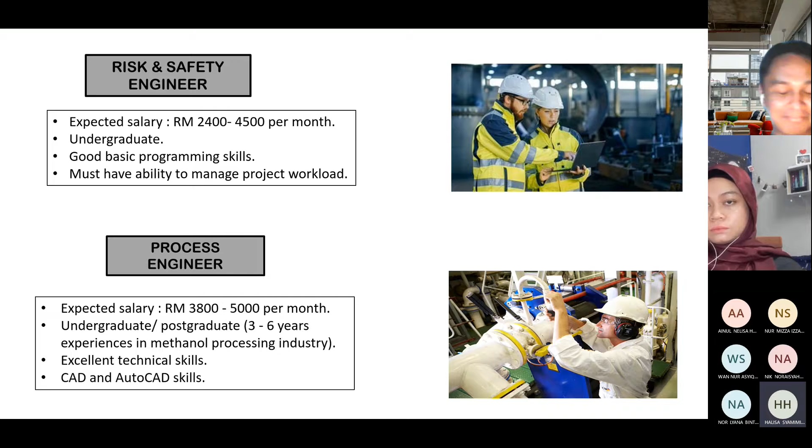Okay, the third position is maintenance engineer. The maintenance engineer is involved with checking, repairing, and servicing the machinery. Other than that, the maintenance engineer also ensures the industrial machinery and equipment run smoothly and reliably.

Expected salary for this position is around RM 3,200 to 5,000 per month, with a minimum qualification of undergraduate with 3 years working experience in this field. He or she should possess knowledge of current good manufacturing practice, knowledge to execute validation protocols, knowledge in Lean Six Sigma, process improvement, and cost saving. Lean Six Sigma is a protocol or principle used in companies or organizations to improve the capability of their business process. Next is ability to lead and manage cross-functional teams and capability to design, install, manage, and maintain the equipment used for plant engineering systems.

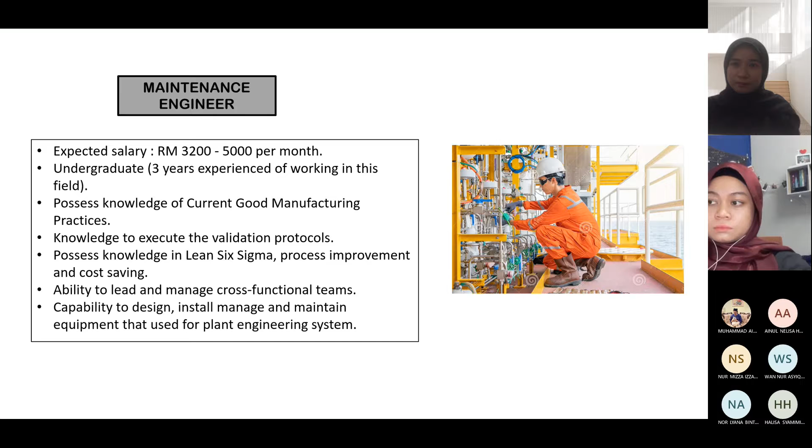Okay, for the next position is environment engineer. Environment engineer is involved in researching environmental issues in the area and creating plans to decrease the effect of that problem on the environment.

The expected salary for environment engineer is around 2,500 to 4,500 per month, with a qualification of undergraduate or postgraduate with a minimum 2 to 3 years working experience. The person should have good knowledge in ISO 14001 or experience managing internal and external audits. ISO 14001 can be known as the effective criteria for an environment management system for some companies. They should have competence in scheduled waste, excellent written communication and proficiency in reports, and also be familiar with local and international environmental regulations and standards.

Next position is project engineer. The project engineer works to plan the project, coordinate project reviews, and ensure proper implementation of project elements. The project engineer also supervises technical staff in engineering projects to ensure the project is completed according to schedule.

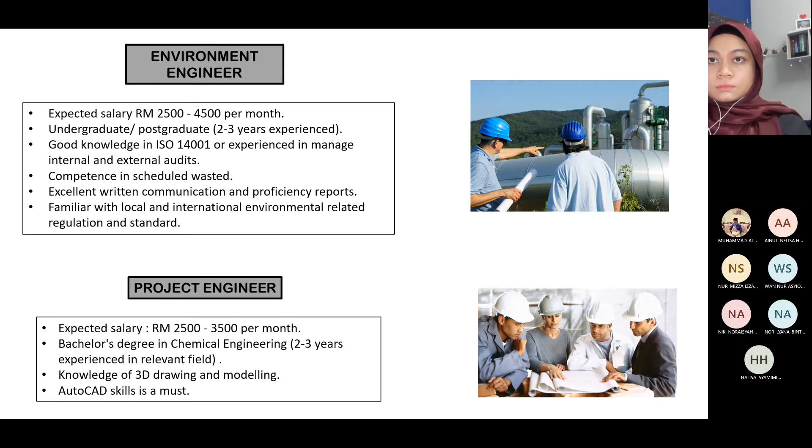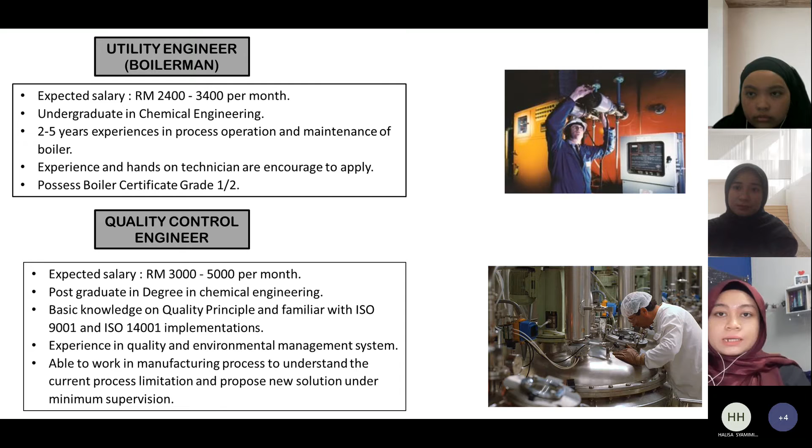For the next one is a quality control engineer, which is in charge of ensuring the quality of all products in a multitude of industries. The expected salary is around 3,000 to 5,000 per month, and for this job we focus more on postgraduates of chemical engineering. Same as the utility engineer, we also added a few extra skills needed for this position, such as basic knowledge of quality principles and familiarity with ISO 9001 and ISO 14001 implementation. They must also have experience in quality and environmental management systems and be able to work in a manufacturing process to understand current process limitations and propose new solutions under minimum supervision.